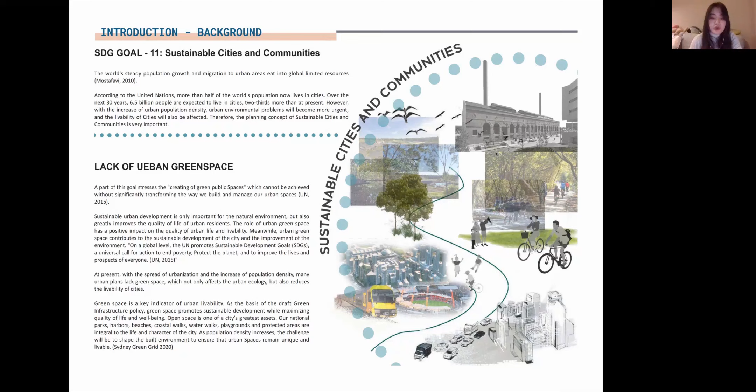There is a need to ensure that public green spaces are easily accessible to all population groups and distributed fairly within the cities. So an urban environment issue that affects so many communities is the lack of green space.

There are three major problems in locations that lack green space, which affect the environment, health, and the economy. It will impact the ecological balance of the cities, reduce the quality of life and well-being of residents, and lead to the urban heat island effect.

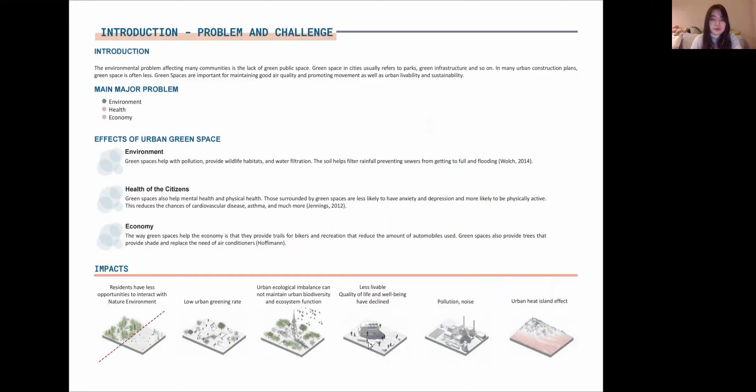The main reasons for the lack of urban green space include rapid population growth leading to crowded cities and less living area, economic issues including the capital investment needed for construction of urban green space, the performance of green space planning systems by city managers, and the spread of urbanization and industrialization.

The main stakeholders include government personnel concerned with formulating urban management; urban residents, who also use the urban green space frequently in their daily life; and education-related and commercial sectors, which carry out commercial activities in the green space.

The place I chose was Fisherman's Bend. Fisherman's Bend is Australia's largest urban renewal project, in Melbourne. It was once a major industry area, and redevelopment of this underutilized site, including the industrial site, aims to create a varied, sustainable neighborhood with a diverse range of housing and employment opportunities, and high quality transportation.

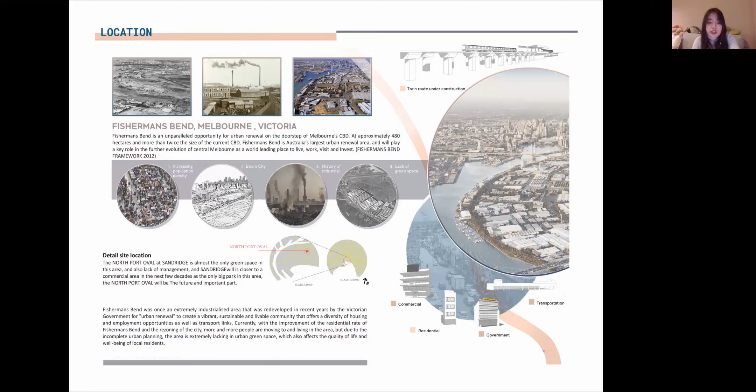With the improvement of local infrastructure, more and more people are settling in these cities. However, due to the development planning, this area still lacks green space—only about 30% urban green space. This has a major impact on the livability of these cities.

For the precedent analysis, I chose One Central Park in Sydney. This project develops urban block infrastructure and a self-sufficiency master plan. At the core of Central Park is a commitment to sustainability and self-sufficiency.

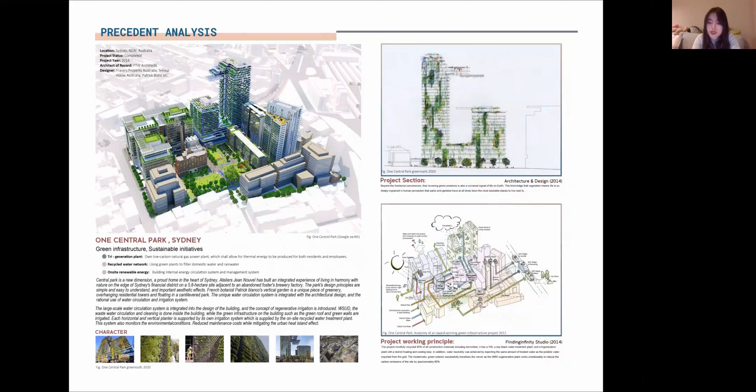This is reflected in two measures incorporated in the project: a low carbon tri-generation power plant and an internal water recycling system, supporting the vision of an environmentally accountable proposal for the cities.

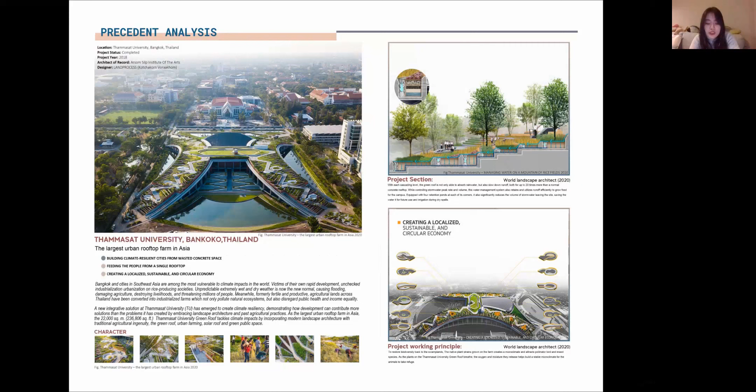The next is Thammasat University in Thailand. It has the largest urban roof farm in Asia. This green roof tackles climate impact by incorporating modern landscape architecture with traditional agricultural ingenuity—the green roof urban farming, like the solar roof and the green public space.

The last one is Singapore's Gardens by the Bay. It has the world's largest climate-controlled greenhouse and a man-made forest. A series of planning and design interventions, such as the National Green Building Energy Efficiency Program, have been carried out in this project to form a sustainable urban development space full of vitality and social choices.

The project integrates landscape and architecture into common considerations, pursuing the design concepts of locality, simplicity, and sustainable development at the beginning of design.

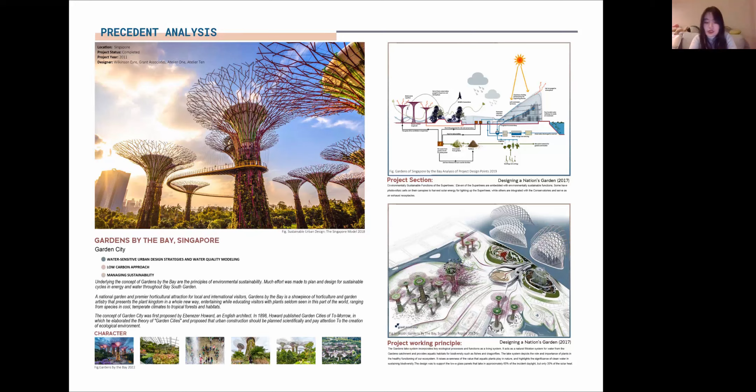So about my three things for the future, the design direction I'm aiming for covers three aspects: health, economy, and environment.

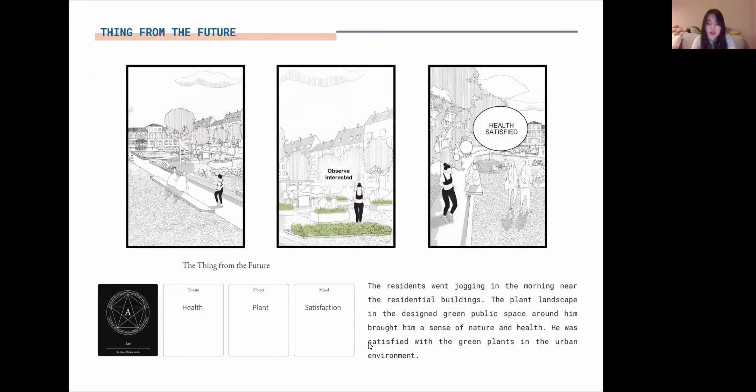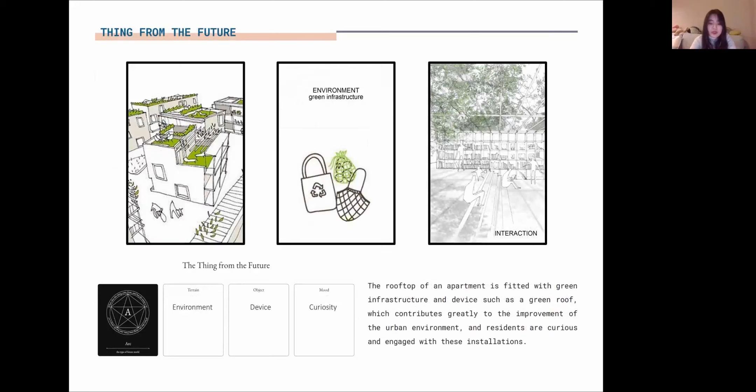The core design concept is to enable residents to understand the importance of urban green space and gain well-being from it. So these are some conclusions of how design for the future can address existing problems, and how the goals of sustainable cities and communities can improve the quality of life and well-being of residents.